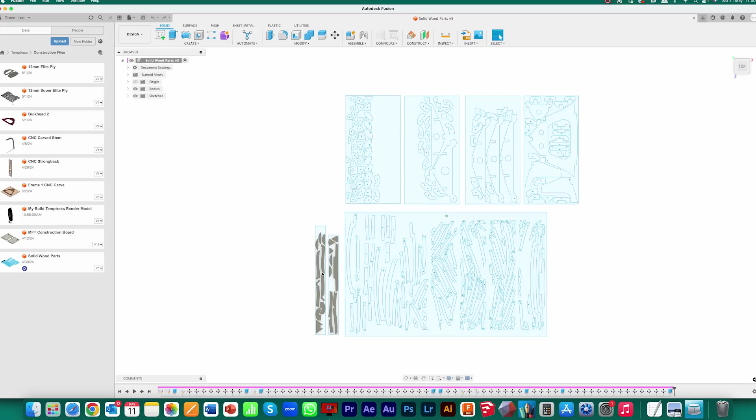Now what I'm doing, you might have noticed, is that I'm actually cutting some of the components that would be ply from solid wood. So that's things such as the gussets, and the bulkheads are going to be plywood still. I've got a mix of some parts that are going to be solid wood and some parts that would be ply, but I'm doing them in solid wood as well. So re-nesting is going to be expected here.

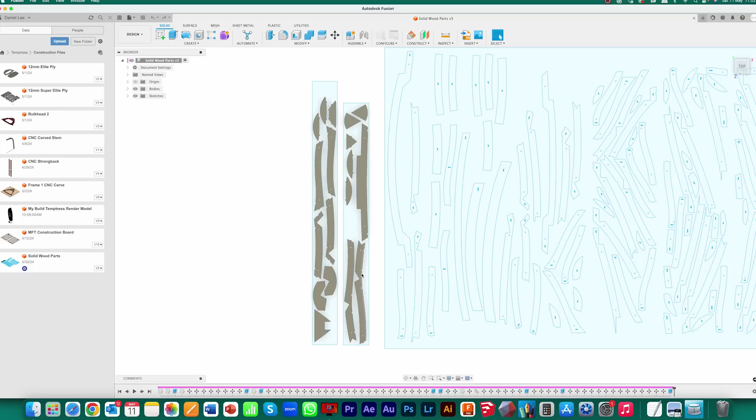And the way that I'm doing that is I'm drawing each of my stock boards. So I go out to the shop and I'll measure one of those boards to see what size they are, and you can see here the 2 boards that I've cut already. So then I'll draw a new bit of stock for the next board that I want to cut. Then what I'm going to do is go and pick up the parts that I want.

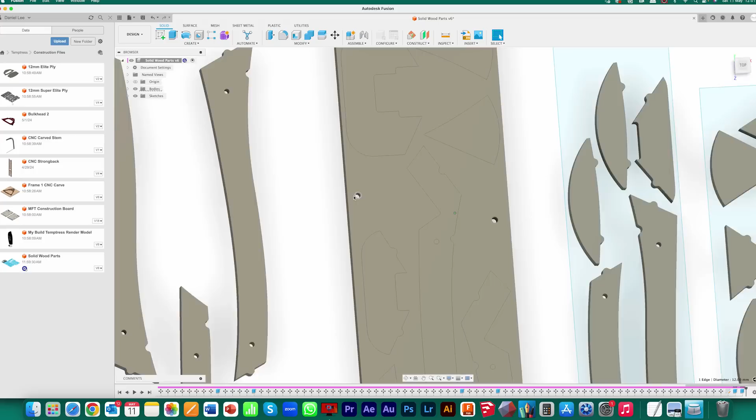Okay, so there's my parts nested. I've done some holes in here which I'm going to mark with a machine, and those are going to be my clamp points. So hopefully we're going to avoid having a crash that we did last time where I drove into a clamp. So they should indicate to me safe places where I can position those. So I'll do a little marking operation for that. And there's my nested parts. So that's ready to go. I'm going to create some tool paths and then we'll cut some parts.

Okay, refinement number 1. So I've used the small tool just to mark a couple of little positions, and I did that without the board clamped down, so they're only tiny little passes. They're not really going to move the board if it's just sat under its own weight. So I've just done that, marked the 4 positions for my clamps on the board, which I've done actually in the toolpath. So I know I'm going to avoid my clamps and not have another crash scenario, which is good stuff. So that's the board loaded up, ready to start running the toolpath on it now.

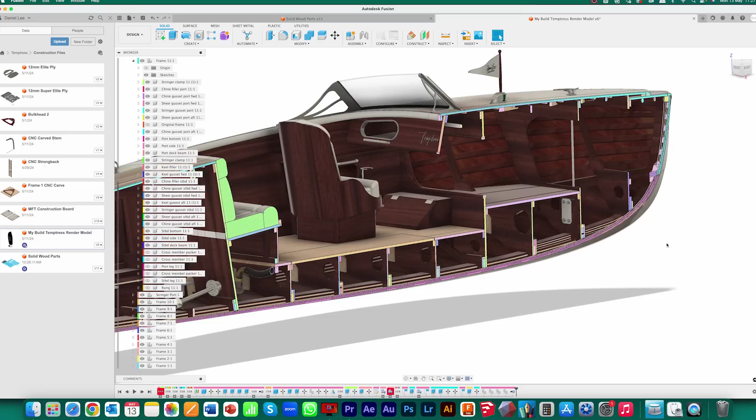So we'll take a quick look in the CAD model and we'll see where these lie within our boat structure. So cross section of our CAD model, you can see here frame 1 that we've done already. So right up forward there, that frame is done with the bulkhead in Super Elite Ply, which is our Sapele ply. And then all of these bulkheads that lie underneath the sole boards here, they're going to be done in our Super Elite. The ones that I'm going to veneer are going to be ones such as this bulkhead here, which you'll be able to see from within the cockpit.

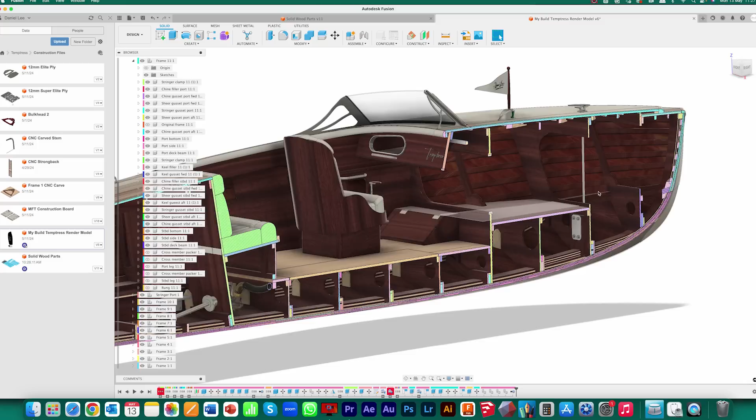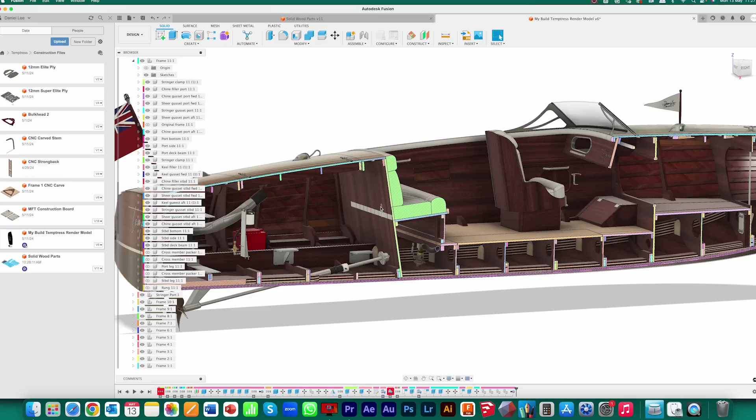And we've got these apertures within the frames that create a crawl space up into the forward end of the boat. And you can see that's the same with frame 2 there. And they're going to have a little capping that will run around the outside of that crawl space there as well. We've also got frame 9, which is our full bulkhead that creates the seat back for the aft seats and also the engine bay as well. So that's going to be veneered as well, although it's behind the seats. I think it'll still be nice that if you pull the cushions off, you've still got a nice Sapele or Utile veneered face to that.

So that's roughly how the bulkheads fall. All of these are going to be Super Elite, and then the visible ones are going to be thinner Gaboon ply with a nice veneer on the face of them. So for that reason, I'm going to jump on to doing frame 3 next. So this is the bulkhead for frame 3. It's one of our solid Sapele ones.

And what I'll do in the next video is we'll take a look at frame 2, which is this one here. And we're going to do some additional things. So we're going to be cutting some veneers. We'll be resawing some veneers for the face of this, and we'll vacuum bag it to apply those to the plywood. We'll be doing some timber moldings that run around this aperture here, and a few different things on frame 2. So we'll get onto that further down the line, but right now let's do a dry fit of frame 3 on the construction table.

Okay, so if you haven't seen the frame construction table before, this is a board that has holes all the way throughout it, and they correspond to holes that are in our frame parts, and it helps us to position all of these frame components and get a frame glued up that's nice and true and square.

And then we've got various other different features that the table does as well, such as giving us the ability to transpose lines through to our frames, like the center line and water lines, that are going to help us to get the frame at the correct height when we put it in the strong back further down the line.

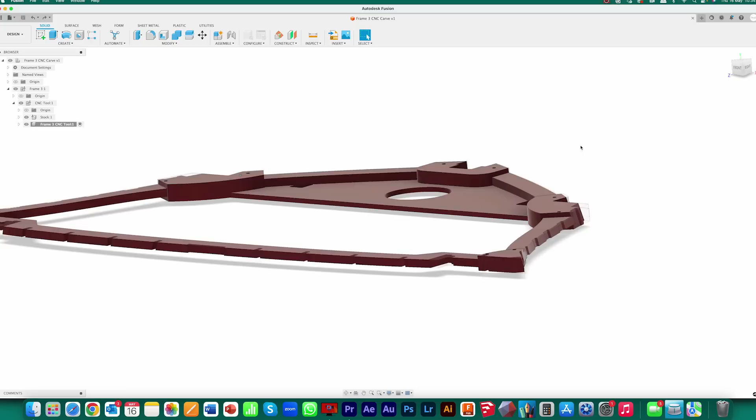So we're all ready to go. We're ready to get that set up on the machine and approach the next attempt at carving. So we'll have a quick look at the CAD model in the computer and we'll see how I'm going to change things up a little bit and then we'll get going. So here's frame 3. Now this process is all about refinements, so I've rolled out a couple of those for a different way in which I'm going to approach this.

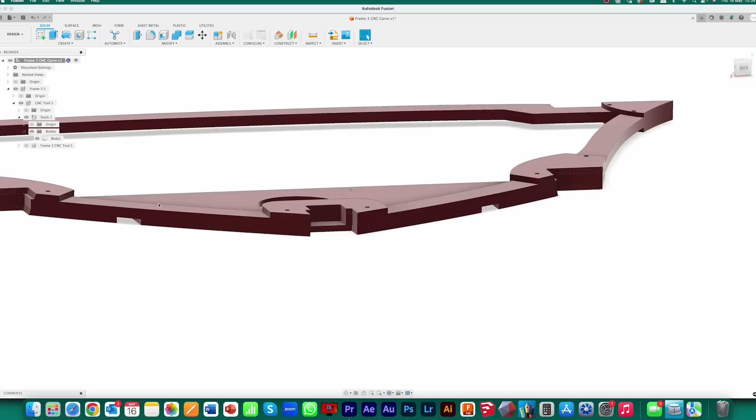So what I've done this time around is I've actually properly modelled the stock. So what you can see we have here is what we've got now. So that is our glued up frame, and you can see that everything's square. And then what we've got here is how we're going to end up with our finished part. So you can see that ghosted out part there is what we've got now, and this part here is what we're going to be left with. So that's really clear to actually see what's going on.

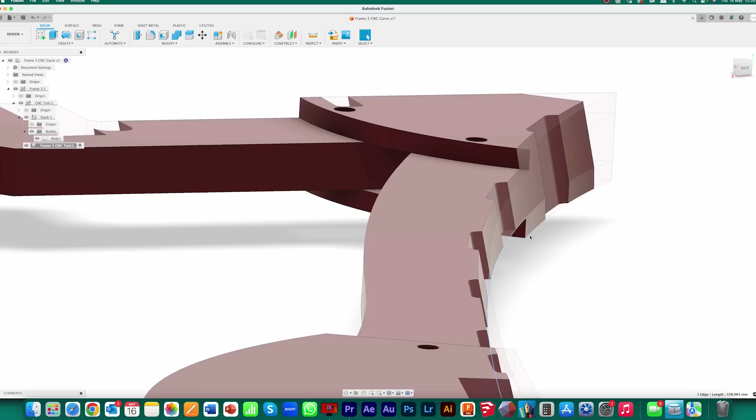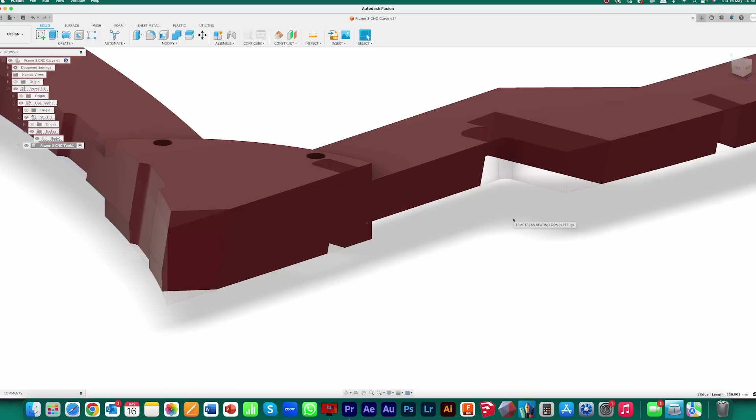So you can see here that we're going to finish right along the edge of the frame as it is currently. And that's because I've designed these parts for this to be done manually. So that is your indication for how far to bevel this frame if you're doing this by hand. So that's the edge that I want to come down to. And you can see that on the beveled side, we're just taking that in slightly. Then we're removing a fair bit of material up around here where the shear clamp goes through, and then up here where some of our deck battens are coming through, angled sections and things like that.

So that's just going to help me to get a bit more of an accurate simulation when it comes to creating toolpaths and work out what's going on. Things are going to be a little bit different this time around. We'll hopefully get a much better result. So let's chuck that on the machine. Let's try round 2 and see how we can improve things.

Okay, further refinements. Here we go, we've got frame 3 set up on the board. So what have I done differently this time? So I've used these fluted dowels to align the frame onto the spoil board. So I drilled the holes in the same way that I did before, and I'm using these. So if you're a long-term viewer of the channel, you might remember these fluted dowels from back in the day when I did the very first revision of this construction board, and I used these to align my frames onto the board.

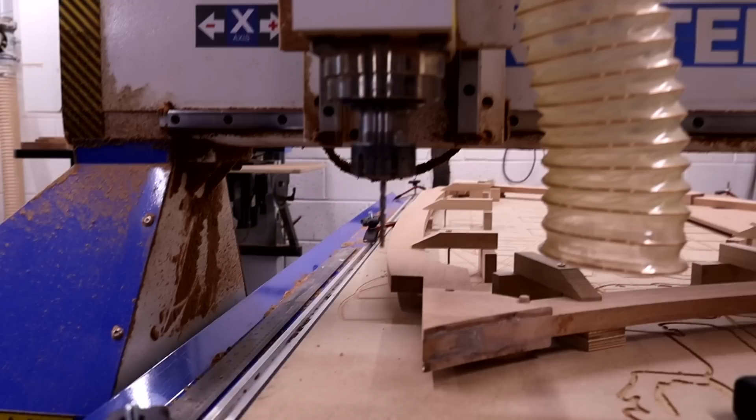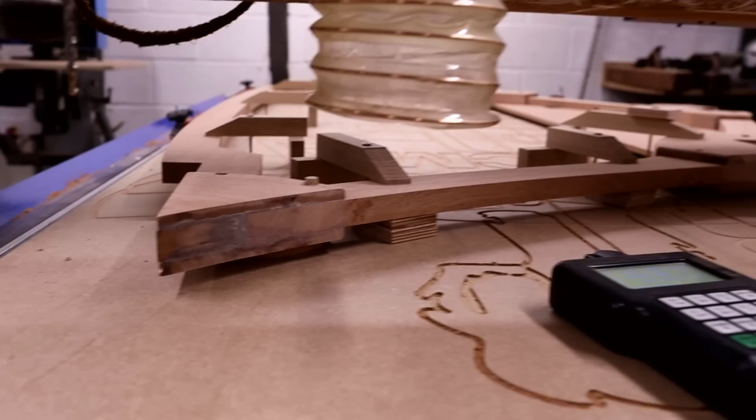So what I'm going to do is I'm going to run that toolpath, and I'm just going to pause it. So I'm going to run it without the spindle going, and I'm going to pause it at various stages and just take some measurements between this tool and the outside of the frame. If we've got everything perfectly aligned, we should have around about the same measurement all the way around, but that's in a perfect world. Let's see what we actually get.

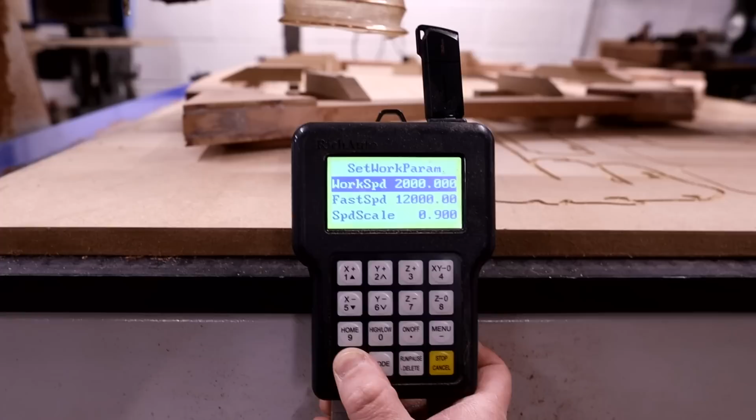So that's what we should be looking for. I'm going to measure that gap and just note it down on the frame. We'll carry on. We've got about 4.5 there.

It's interesting listening to the stepper motors without the spindle running. I've never actually heard the actual sound that they make. Sounds like a bit of an orchestra playing in my workshop.

Okay, results were pretty good, to be honest. We've got a slight difference in some places. You can see here we've got a 5mm gap on that side, we've got a 2.5mm gap on that side, which would indicate that our toolpath is a little bit too far this way. That does actually tie up with the center line difference that I've measured here, which is 2mm that way, so it's roughly matching. Our chines are about the same.

We've got 6 here, 4 here, so everything's kind of saying we're 2mm too far that way with the toolpath, but I'm going to be honest, 2mm accuracy on something like this, I don't know that you'd ever even be able to measure most parts on a boat to an accuracy within 2mm, so I really don't think chasing down those kind of tolerances is really worthwhile.

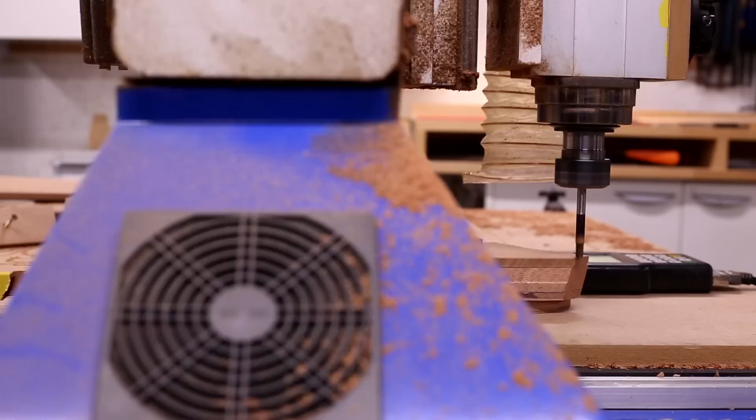So there's the result of frame 3. I'm really pleased with how that's come out actually. You see the finish that we've got on there is really nice. Good result on pretty much all of the frame. You can see this is really clean here. We have got a couple of little bits of breakout.

There's things like this. We've got some little pieces, but if you compare that to what we got on frame 1, where we had kind of big chunks, and then we had that big chatter mark in the middle as well, we've not got any of that. We've got a really good finish along here through the whole height of the frame, so I'm really pleased with that.

Yeah, these tiny little bits of breakout. I mean, you've got the tool coming around like this, and just as it kind of whips in, it's obviously pulling the grain out. I don't really know of any way to avoid that any further. If anyone's got any suggestions, please feel free to drop them in the comments and let me know what you think for ways we might be able to get around that. It also happened up on the deck beam quite a bit.